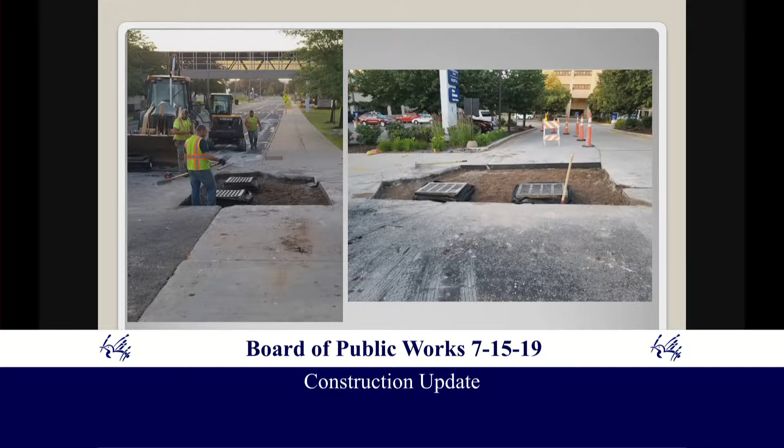A lot of times what you don't see is that in between our larger projects, we have miscellaneous projects that come up that we have to address right away. Over on Call Shed by the clinic, the two inlets you see there in the picture where the entrance is deteriorated and started dropping out, so we weren't able to allow vehicles over top of them. We got a locate called in, and because of the amount of traffic there, we had staff come in early in the morning, get the majority of the work done, and pour the concrete around 6:37. So when we have heavy trafficked areas, we try to accommodate the public and inconvenience them as little as possible.

Am I able to do that from here, Tom? Okay, so here's just another shot on Call Shed. We can go to the next slide then.

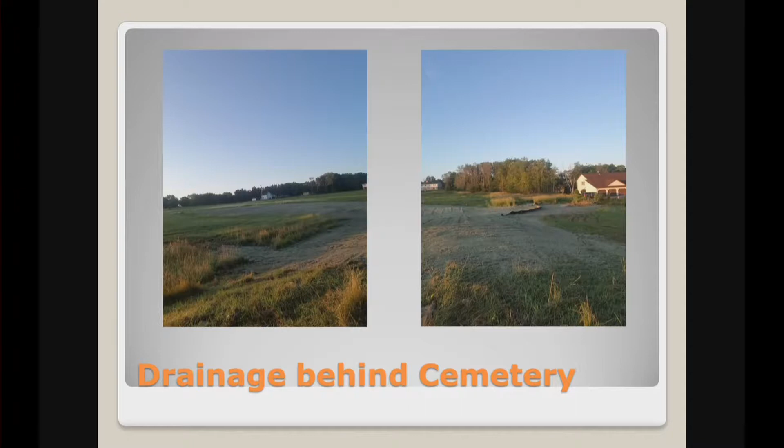Next, here's a couple more pictures behind the cemetery there.

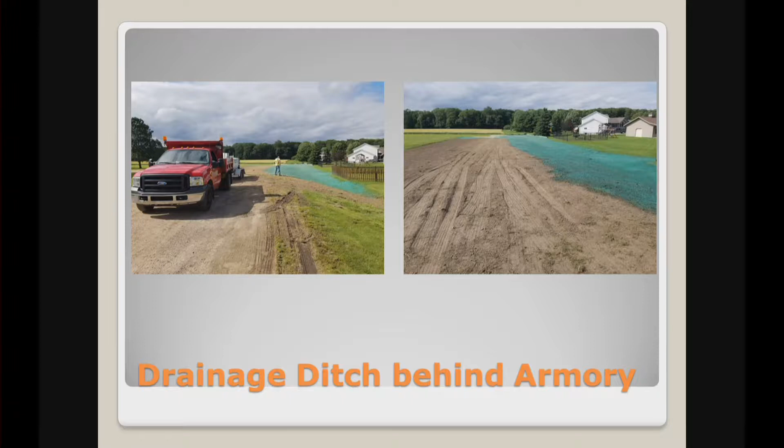Another project we started last year was a ditch over by the Armory. This was one of those areas that helps clean up the drainage going into some cul-de-sacs behind the neighbors there. This spring, we were finally able to get out there, get everything topsoiled and hydroseeded.

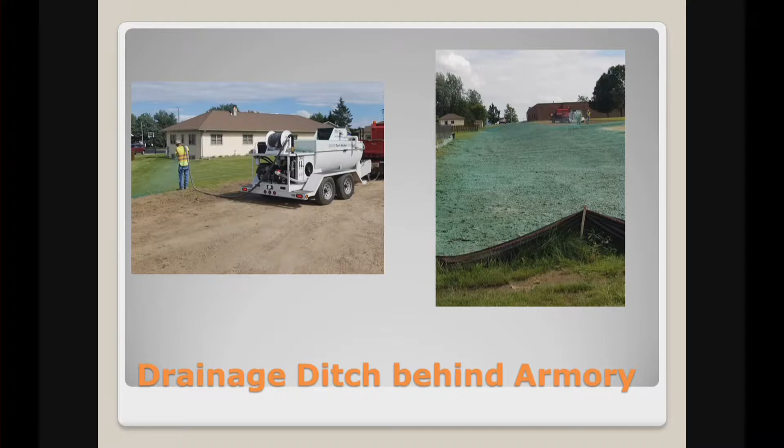Here on the left, you can see the new hydroseeder that we just bought. The decisions you guys make here in purchasing equipment come in very handy in us doing our job out here, making things efficient and I think saving the city money. This is our new hydroseeder - we've used it quite a bit already this spring and we'll be using it throughout the whole summer.

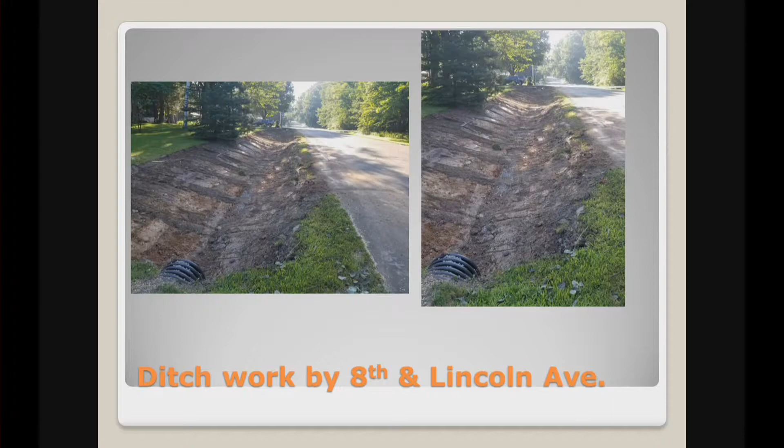Here's a miscellaneous ditch project we did over on 8th and Lincoln where they were having drainage issues. Throughout the year, we do these miscellaneous jobs that come up in between our main projects.

That was on the north side of the street.

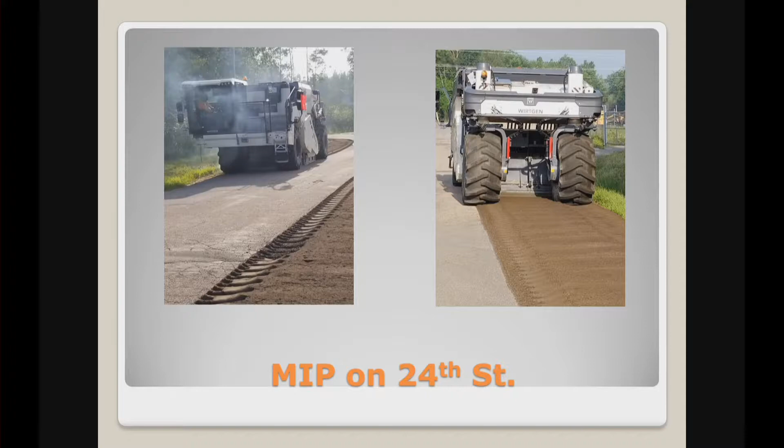Here's a photo of something you don't often see. This is part of our Mill in Place projects that we got started on this last week. American Asphalt, the contractor for asphalt paving and pulverizing, was in with their pulverizer over on 24th - this is their new pulverizer going down the road pulverizing the asphalt. They also did Hickory Lane, Hickory Court, Fillmore, and Weber at that same time.

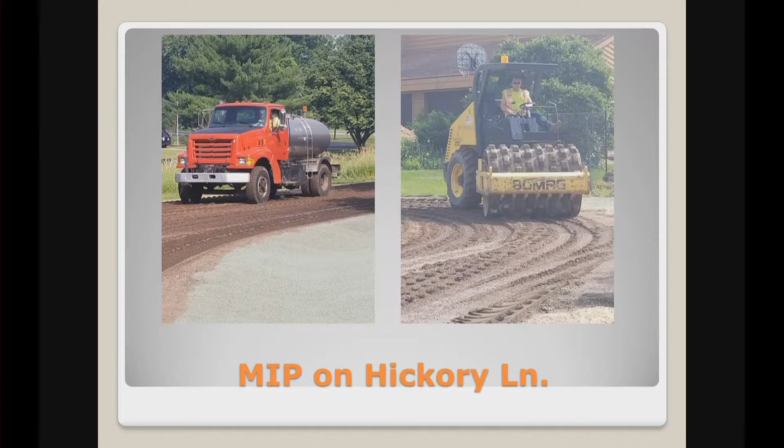We'll raise the manhole covers up, then they'll be into pave. So these projects that they pulverized last week, right now we're looking at paving them later this week, Thursday or Friday. We should have the binder coat down on those 5 roads.

Next, Fahrner was our contractor, or they won our bid for doing some chip sealing in the city of Marshfield, and also some pavement rejuvenation. They were in last week where they put down the GSB-88 on the 3 roads we had selected: State Street between Adler and Schmidt, 8th Street between Oak and Pine, and South Apple between 25th and 29th.

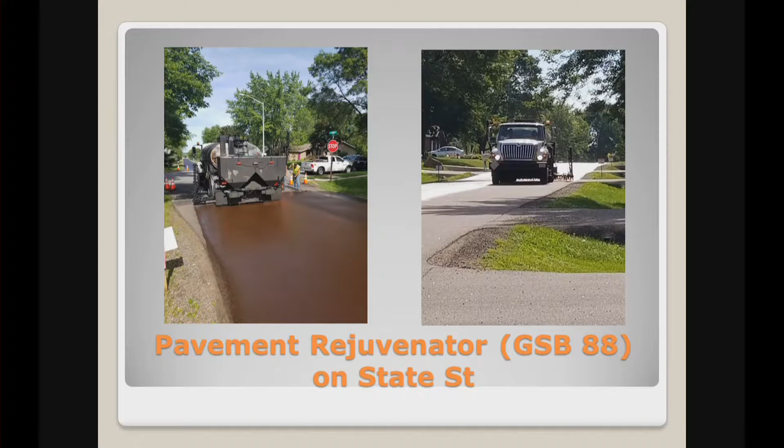So right there where you see him putting it down, it goes down and looks just brown like it shows in that left picture. Then as it dries, we can go to the next picture. When it dries, that's when it starts getting real nice and black. You can go to the next slide. You can kind of see down here, it still looks wet on the left. It takes probably about an hour, hour and a half where traffic can't drive on it. Once it's dry, like it shows on the right side, traffic can go ahead and drive on it. So this pavement rejuvenator is sealing the road to prevent moisture from getting into the asphalt pores.

We tried this last year, and we tried a couple more roads this year. This is something we're trying in our maintenance program to see how it works. We're trying to get to the roads after they've been paved in year 4 and put this on there, and hopefully this will help extend the life of that road out even further. It works differently in every place you go, so we're trying it here, seeing how it works, and deciding if this is a tool in our toolbox or not.

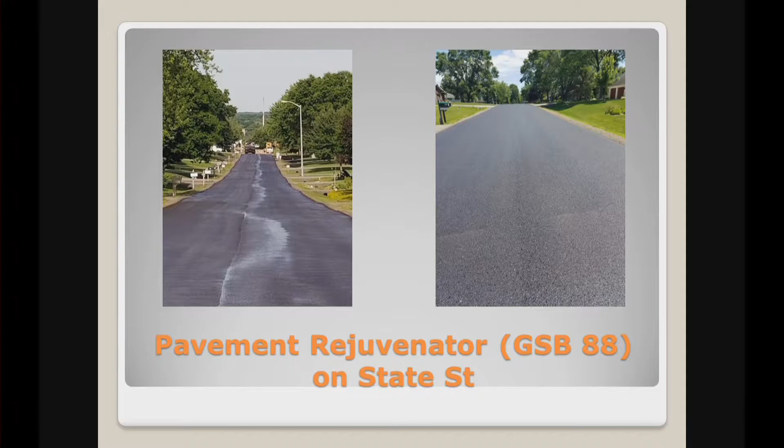Another thing you don't really hear or see about, we're also doing pavement markings on sidewalks and bike lanes and other things throughout the city.

Just to touch base on a few other main projects we're working on: our sanitary sewer crew finished up on Schmidt today, and we're heading over to Ives to do the laterals on Ives between Lincoln and Schmidt. Our mill and place crew will be starting on Schmidt hopefully tomorrow. One of the things we wanted to do is cut down the duration that some of those streets have construction. Water has already been on Schmidt, gas has been in there, sanitary sewer too, so now our mill and place crew can get in there, and hopefully we can get things wrapped up in the next month. It doesn't seem like a whole summer on one street for those residents.

So that's all I have.

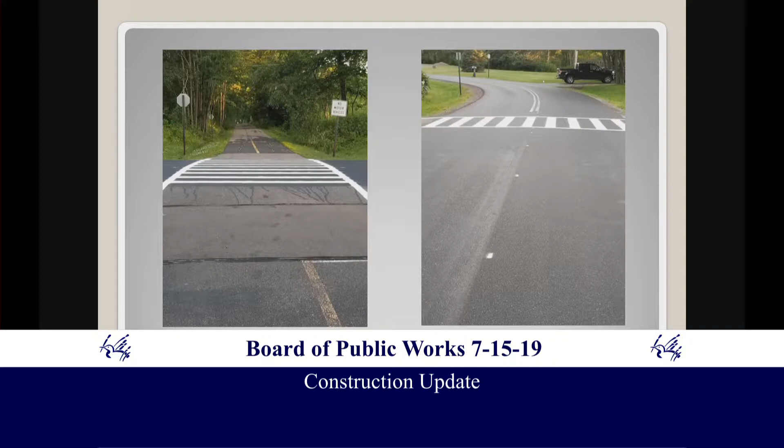Any questions? Mr. Bargender: On the rejuvenator, how long is that supposed to last? 3 years.

Then would it be eligible for chip seal after that? What I'm looking at doing is the rejuvenator again a second time to push it out 3 more years, and then the chip seal. What we're hoping is that it eliminates cracking and seals the road, so it just looks and lasts better.

So just about every road that's been paved with blacktop in the last 3 or 4 years is going to get that? No, it's just a select few. Is it like a test or what? Yes, we're doing it on a select few so we can monitor it and see how it fits in with everything else we do, and monitor the cost to make sure it's cost effective. I hope it works. Thank you.

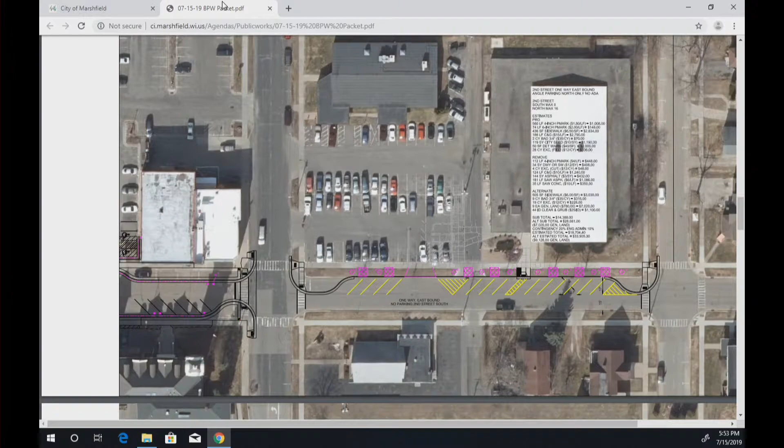The next option we looked at was providing angled parking on the north side while also maintaining the parallel parking on the south side. This creates an additional 16 parking stalls. We get slightly better alignment across Maple Avenue, but it has the greatest disturbance. We basically have to remove and replace all the curb and gutter on the north side of 2nd Street. It also has the greatest cost for making this type of connection work.

You also lose some area for trying to mimic the green corridor further east from 2nd Street. The cost to produce this design without other amenities was $56,000, about $3,500 per stall. In both options, it creates a one-way street with traffic only going eastbound on 2nd Street at this location. I just want to throw that out for discussion. Other options are to do nothing, or we can look at other options too, but I want to get the discussion started.

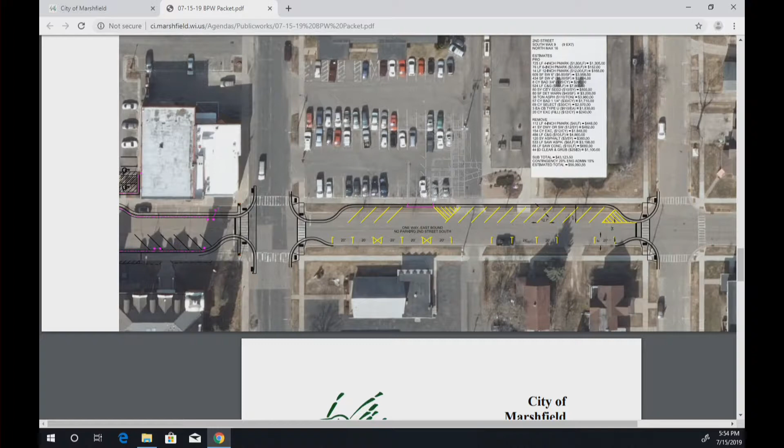I have Lori from the library, so if you have questions on some of these things, we can answer that. Earlier this year, we added 2 additional handicap parking stalls in the parking lot right near the entrance of the community center. So I'll throw it back for questions.

Mr. Zaleski. Yes, thank you, Mr. Chairman. One thing you may have left out as an option was to decrease the hours of the library.

No, the first thing that went through my mind is that certainly there are some in this city that have a real distaste for one-way streets, and this would excite that discussion again. Just to be mindful of that as we go forward, creating these stalls at $5,000 apiece on top of another one-way street, you can imagine the outcry. I can imagine the outcry. So I don't know, I'm in the 'I don't know' camp on this one right now.

Anybody else? Mr. Bargander: I'm very much in favor of option one. This is something that's really needed down there at the community center library. Parking is at a premium a lot of times when there are any type of special events going on there. As we increase usage at the community center, we just need those extra parking stalls.

Angle parking, one-way street, much safer for people trying to cross the street. You don't have to look—I mean, obviously you should always look both ways—but you're only really committed to looking one way to make sure there's no traffic. And backing out gives you plenty of room to back out. That's not a real heavily traveled road as far as I'm concerned. I think people will make the adjustment to one-way; they already have on two blocks either side of Central Avenue. And I'm all for it.

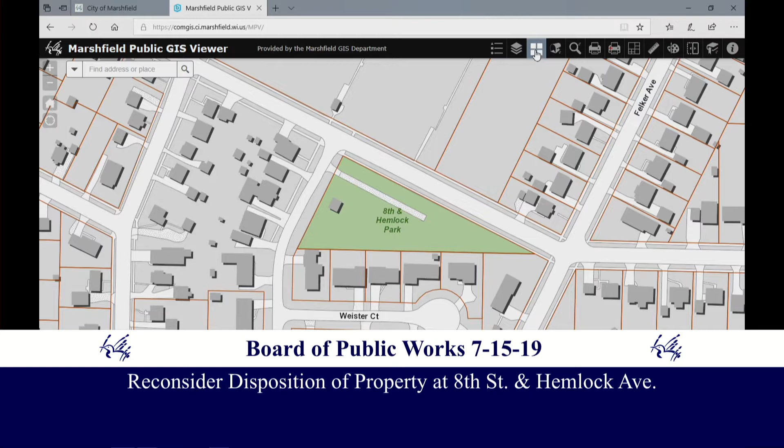The issue was tabled at council last year sometime. I understand it's our discretion to untable anything anytime we want, but I thought, well, let's talk about it here. I talked with Mr. Knoeck, I talked with Mr. Miller. The three of us had come to an agreement on things, and so I just wanted to talk about it here and look to essentially make a motion to approve it here and then send it on to council on what to do.

So since we tabled it, we've had a housing study that has described a dire need for available land in the city to build houses on. Here is some. The housing study also indicated a certain price range for some homes. Those in that price range fit here. The realtors in our city have asked for, aside from and before the housing study, aside from it, after it, and beyond, have asked for more available land within the city.

Here it is here. And the neighbors have made some comments towards the fact that they would like to purchase that property should it become available. So it seems like the rational solution, based upon the housing study, the needs of the realtors, the needs of available housing, and those neighbors, would be to hire a real estate professional and list that property and get it moving. I think the eventual intent, or the market probably, would place houses there just based upon the demand that we're being told that we have, and then the tax base would increase naturally as a result of that.

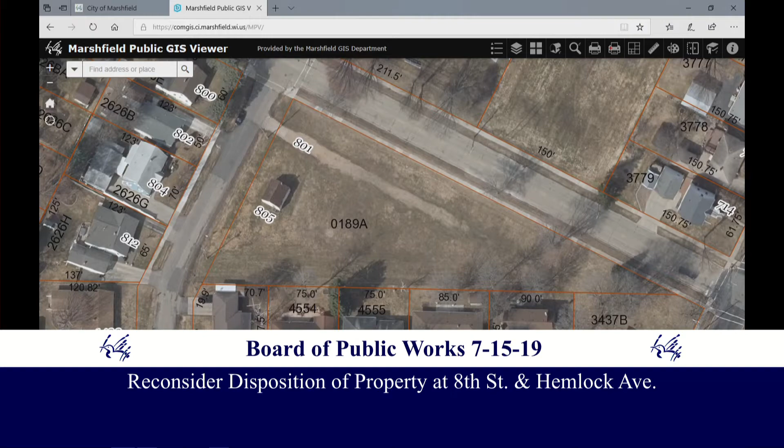Chris, go ahead. Two questions. One, again, the school schedule. Do we have any idea when they're actually going to develop the track and the other parts? Do we have any idea?

Mr. Miller will enlighten us. Yeah, I know they had tentative plans to get some kind of earthwork moving this midsummer this year. They're still waiting to hear back from the State Historic Preservation Office on what they can do with one side of the stadium, if they have to do anything with preservation or not. I understand Alderman Witzel's idea of seeing how the season goes before we decide, maybe there is a use for parking with it. The school district didn't seem to want it because then they'd have to maintain it, develop it, put asphalt or a hard surface on it, and lighting and all that kind of stuff. So, of course, why would they want it when the city was taking care of all that?

I think the intensity and usage of that site will be significantly less compared to the football stadium. Obviously, you've got the capacity of thousands of people versus a few hundred people. Would they still utilize that spot for parking potentially?

I don't think it hurts to wait to see how that's going to be utilized as a soccer field and a track. Our understanding is that the track would just be resurfaced. They wouldn't be expanding it necessarily, but they would be expanding some of the grass areas to utilize for track and field events and stuff.